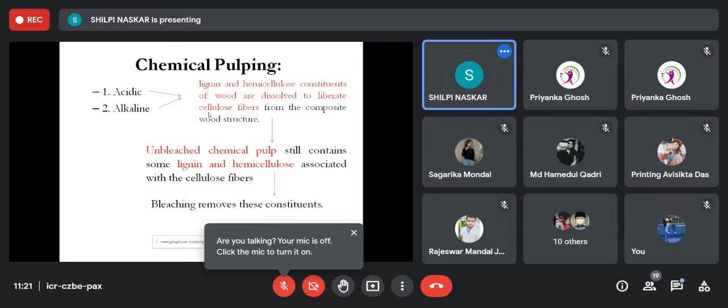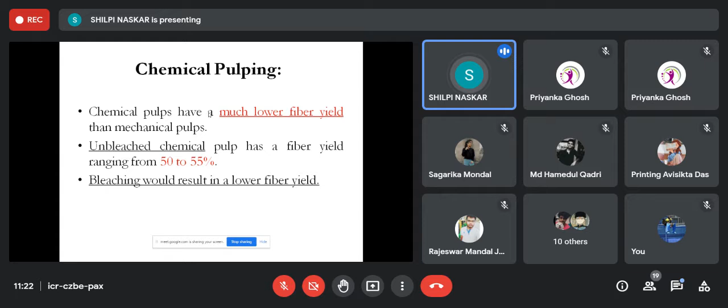And its fiber yield output from this pulping process is about 50 to 55%, and bleaching would remove that lignin or actually bleach that lignin part. Okay, so that also results in a low fiber yield. Okay, because you are separating lignin there. Okay.

So starting the sulfite pulping. Okay. This is acidic pulping as we have learned before. Okay, in the sulfite process, pulp chips or wood chips are cooked with sulfurous acid and one of its base salts, which may be calcium, sodium, magnesium, or ammonium. Okay.

Sulfurous acid is normally produced by burning sulfur in presence of oxygen at controlled pressure and temperature, so that sulfur trioxide is not produced, because sulfur trioxide reacts with water and produces sulfuric acid. Okay, but we need sulfurous acid. So we need to burn the sulfur in presence of oxygen at controlled pressure and temperature, so that it produces sulfur dioxide. And then when it reacts with water, it produces sulfurous acid.

Sulfurous acid and limestone are next reacted to form calcium bisulfite. Now, this calcium bisulfite, sulfurous acid, and the pulp, when reacted with each other, produce hexose, pentose, sulfonated lignin, and the segregated cellulose.

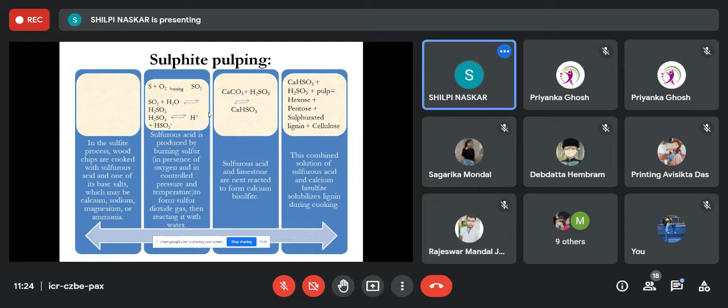Basically, this hexose and pentose comes when the hemicellulose hydrolyzes; it produces hexose and pentose. Okay. So in sulfite pulping, not only the lignin is getting separated, the hemicellulose is also getting separated to separate the cellulosic fiber. Okay.

Now, I have already told you hemicellulose comes in the spent solution in the form of hexose and pentose. Okay. Due to absence of hemicellulose, the strength of the paper is decreased a little. Okay. The sulfite process is not suitable for pulping wood having high resinous content. Okay, this is the limitation of sulfite pulping.

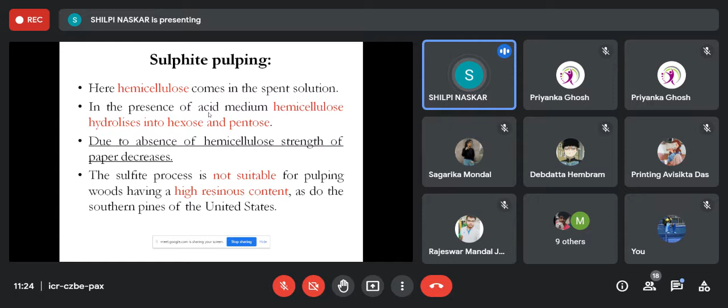So this is the block diagram of sulfite pulping. Okay, here in the burner, as you can see, I don't know if you can see the cursor or not. The burner, that is the middle part of the left. Okay, in the burner, partial combustion of sulfur is done in presence of oxygen. Okay, the sulfur and oxygen.

And partially sulfur dioxide is produced. In the combustion chamber, combustion of sulfur is completed and cold sulfur dioxide and water is sent to the scrubber. I do not know if you can see the cursor or not. Okay, so first scrubber at the top left hand side. In the scrubber, SO2 reacts with water and sulfurous acid is produced, and finally it is sent to the acid storage.

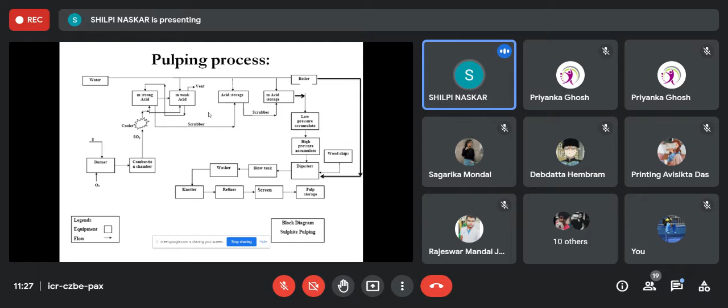Okay, here we'll not be learning the configuration of blow tank and washer. We'll be learning it at the sulfate pulping. We'll be learning about the configuration of the digesters. Now, the type of acid pulping or sulfite pulping. There are two types. One is cold acid process and another is hot acid process. Cold acid process, the digestion temperature is about 30 degrees and pressure is equal to atmospheric pressure and time necessitated is 7 to 10 hours. Definitely the power consumption is less.

In hot acid process, digestion temperature is 80 degrees centigrade and pressure is 60 to 70 psi. And digestion time is 5.5 to 7 hours. In hot acid process, power consumption is definitely high. So inside the digester, temperature and pressure changes with time. During digestion, the temperature increases up to 100 to 110 degrees centigrade. And time when temperature increases is 4 hours.

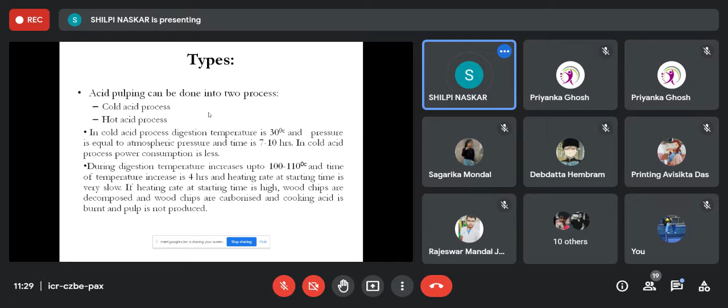And heating rate at starting time is very slow. Why? Because if heating rate at the starting time is very high, then what will happen? Wood chips are decomposed and wood chips will be carbonized and cooking acid is burned and pulp will not be produced. So, after reaching temperature 110 degrees centigrade, heating rate is increased.

Now, in this time, cooking acid comes in contact with the lignin. During digestion, vapor is produced and temperature is increased and pressure is also increased. So, to reduce the pressure, certain amount of condensable vapor is released to the high pressure accumulator and non-condensable vapor is released through vent. So, pressure falls and temperature falls. Heating may be direct or indirect.

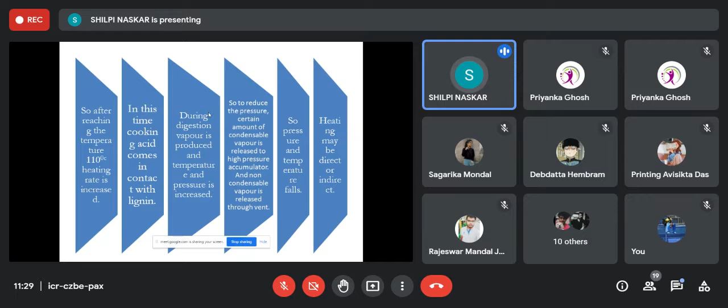So, what are the properties of the sulfite pulp? Unbleached sulfite pulp has moderate strength, soft and flexible. Has low lignin content and easily bleached. It is used for supplement of mechanical pulping, for example, newsprint. Sulfite pulp has long been used to make white printing and writing paper because bleaching again removes some of the lignin. The sulfite process was the most important chemical pulping process until the mid 1900s. So, what are the limitations of this process?

In recent years, the pollution amendment has become more stringent, requiring recovery of polluting substance. But here, to recover the calcium sulfite liquor and thereby reduce the pollution load of its effluents, other chemical bases have evolved, since it is impractical to recover calcium sulfite. So, the sulfite process has been largely replaced by alkaline pulping process nowadays, with sodium, magnesium, and ammonium bases adapted to pulp mill chemical recovery systems. Chemical recovery is possible for sulfate pulping, so it is now in the picture in a more efficient manner.

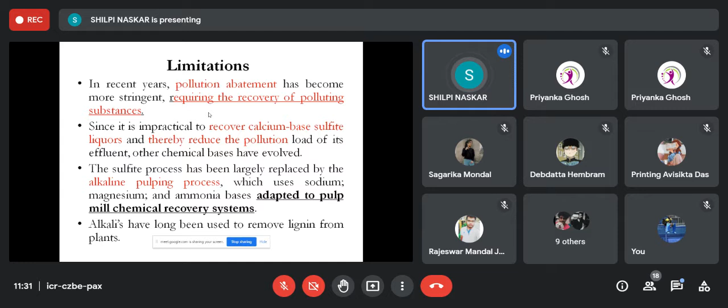Alkali have long been used to remove lignin basically, though the hemicellulose cannot be separated.

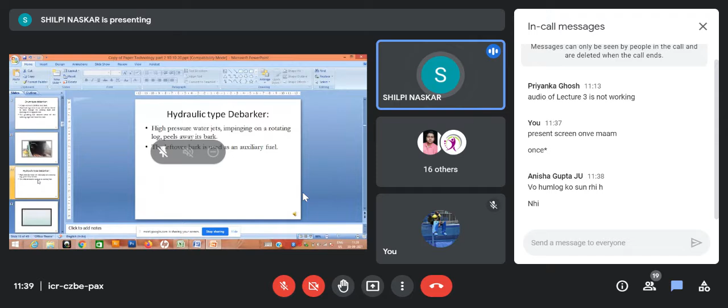Okay, okay fine, sorry I haven't shared my screen, I'm so sorry, your entire screen, sorry. Let me check. Okay, which slide is not working? Just a minute, this slide was not working.

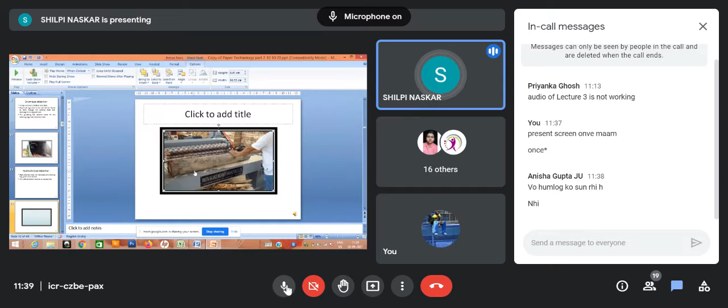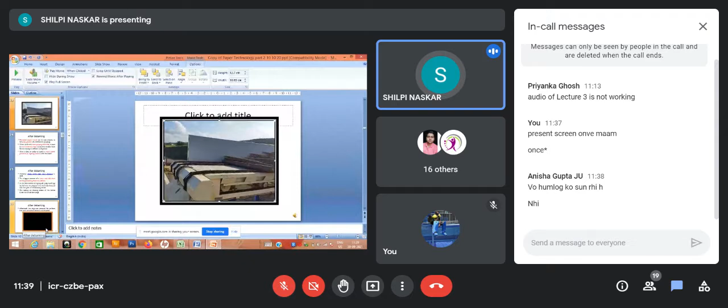This should be working, this machine should be working, then this machine should be working. So send the exact slide number, which one is not working, then I'll rectify that and send it back to you. Okay, fine, just do that.

Okay, now next is today's lecture. That is the 5th lecture. This lecture is about chemical recovery. I hope you have already gone through the configuration of all of the digester, then diffuser, and all of the instruments which I have told you about in the sulfate pulping. Okay.

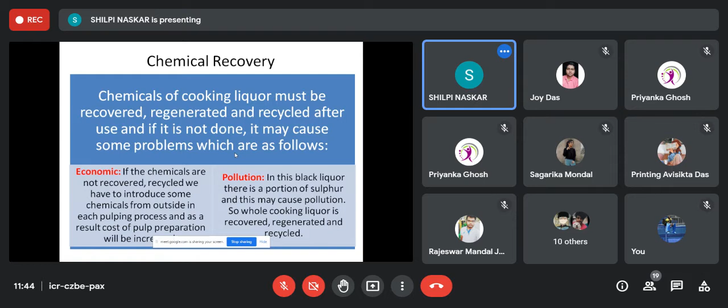See, some of the slide has been recorded, which is not that clear. So I am doing it fresh. So I'm not going for the slideshow view. It is kind of a totally theoretical one. Just let me go to the slide. Just a minute.

Okay, fine. The problem is that the recording does not have very good sound quality. So I'm doing it in normal mode. So I'm doing it in this mode.

Okay. So this is the fifth lecture of chemical recovery of the pulping process, of the sulfate pulping process. So the chemicals of the cooking liquor which is being used for sulfate pulping must be recovered, regenerated and recycled after use, and if you do not do it, it creates certain problems. Why is sulfate pulping used so hugely? Because the chemicals and the heat energy can be recovered. That's why the cost of the process will be lower, as you can reuse the chemical.

On the contrary, you cannot reuse the chemical of sulfite pulping. So that's why the cost of sulfate pulping is lower, and that's why it is more into the picture. So first it is economic. If the chemicals are not recovered and recycled, we have to introduce fresh or virgin chemical from outside in each pulping process, and as a result the cost of pulping will be more. So if you can reuse it, it will be economic.

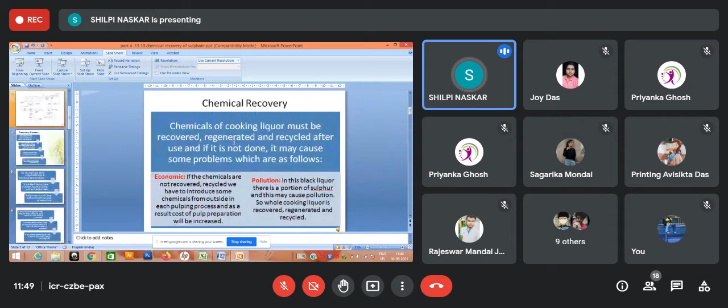I have shown it, just a minute. No, I have to tell you that I haven't found the video actually. You can check on YouTube if you find a relevant one.

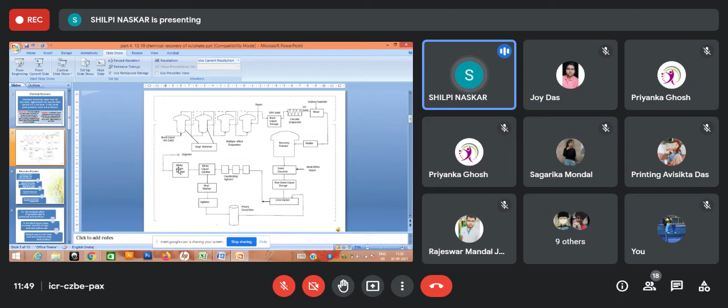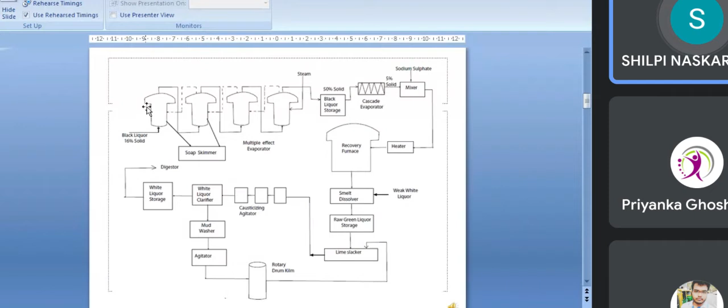So the configuration of this multiple effect evaporator is that it has shell and tube: the outside shell, and inside there are tubes. The black liquor passes through the tubes and steam passes through the outside shell. These are multiple effect evaporators, 1, 2, 3, 4. The black liquor passes through the tube and the steam is at the outside shell.

So it will not be in direct contact. Black liquor passes through the tube and steam passes through the shell, and in this way the evaporation happens. In the multiple effect evaporator, soap is produced as a byproduct. Moisture is there from sulfate pulping, because only 16% solids is there, so some moisture will be evaporated off.

Okay, due to this steaming operation, the soap will be produced as byproduct. Now in the black liquor there is certain amount of fatty acid.

Just check. The process is whatever I am telling you. If you find it not that easy to connect, these things are written in the next slides actually. As I am showing this block diagram, if you understand from here, it will be better understandable. So that's why I'm sticking to this particular slide basically.

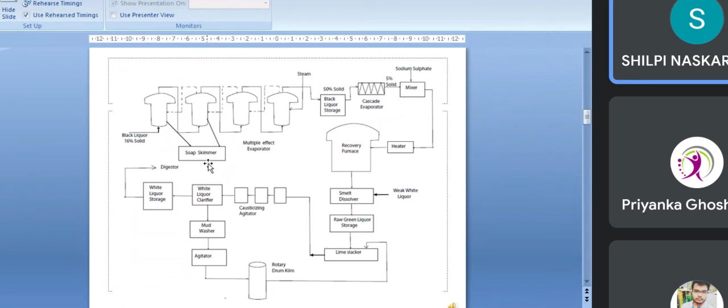So next it will go to the black liquor storage, but before that, in the black liquor there is certain amount of fatty acid and sodium salt. So sodium reacts with fatty acid and produces the soap as byproduct. So this is the operation of the multiple effect evaporator, and this is also called as the soap skimmer. Okay, so everything is written over there in this process, whatever I have told.

So just see the block diagram. I can definitely go back anytime. Okay, it will then go to the black liquor storage, then cascade evaporator. So everything, okay, this is 65%. Here I have not written it right. This is a typing mistake. 65%. So every process is done here to remove the part and to recover the chemical basically.

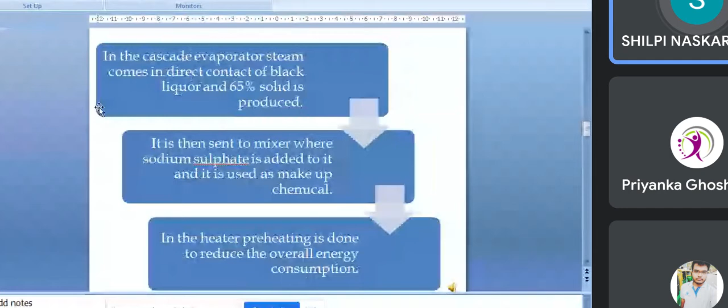So here the 16% solid in the evaporator, steam is applied, everything is given over here. In the multiple effect evaporator, soap is produced as byproduct. Now in the cascade evaporator, that is the next evaporator, the steam comes in direct contact with the black liquor, and 65% solid is produced. If you remember, we have started with 16% of solid in the black liquor, which comes out of the sulfate pulping process.

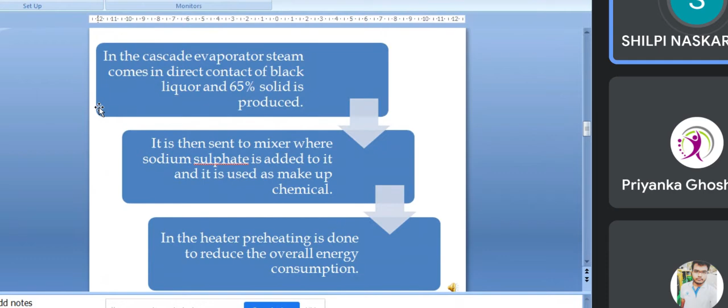Now it is then sent to the mixer where sodium sulfate is added to it and is used as makeup chemical basically. In the heater, preheating is done to reduce the overall energy consumption. So in the cascade evaporator, after it comes in direct contact with the steam, it produces 65% of solid, and the outcome goes to the mixer where it is mixed with the sodium sulfate, which is the makeup chemical. Then it goes to the heater for preheating, and then it goes to the recovery furnace.

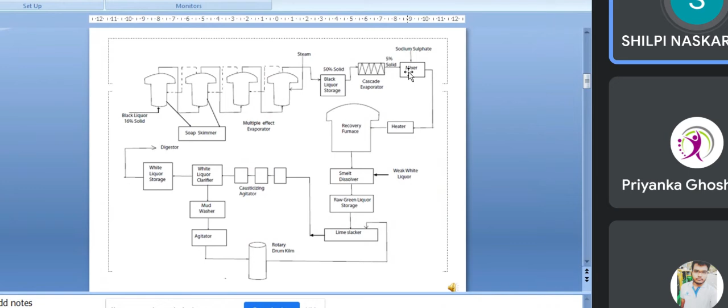Now, in the heater, the preheating is done to reduce the overall energy consumption in the recovery furnace. If heating is done previously, in the recovery furnace the reaction can start instantaneously. So, in the recovery furnace, the organic portion of the black liquor will be combusted to H2O and CO2, and the inorganic portion is separated. Now sodium sulfate, which has been added as makeup chemical in the mixer, reacts with carbon and produces sodium sulfide and carbon dioxide in the recovery furnace.

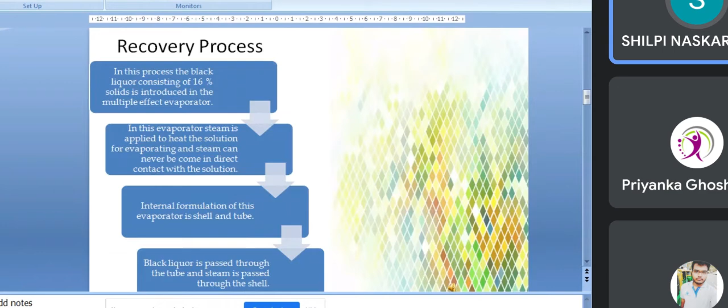So the reaction is Na2SO4 plus 2C, producing Na2S plus 2CO2. And if you remember the process of sulfate pulping, Na2S is used as the reactant there.

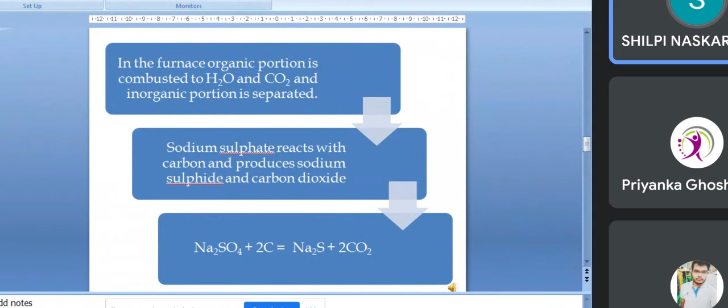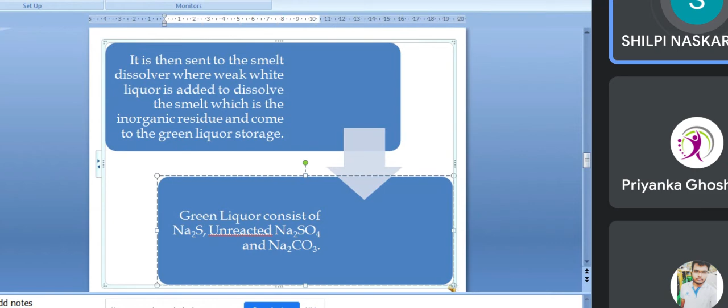Now coming to the next. From the recovery furnace, it is then sent to the smelt dissolver, where weak white liquor is added to dissolve the smelt, which is the inorganic residue, and comes to the green liquor storage. Now in this green liquor storage, what chemicals will be there? Na2S from the previous reaction, unreacted Na2SO4, since all the Na2SO4 may not be used, and Na2CO3. These all are the reactants of the sulfate pulping process, if you remember.

Now next it is the lime slaker. There Ca(OH)2 is added with the chemicals which have already been recovered, and in this lime slaker a causticizing agitator is used to agitate the whole chemical. The agitator basically has a paddle with a stator. This is kind of a stirrer which will stir the whole chemical so that the Ca(OH)2 can react with all other chemicals.

In this causticizing agitator, the agitator will agitate so that the Ca(OH)2 will react with the Na2CO3, and it will be producing NaOH and CaCO3.

So Ca(OH)2. This is the common reaction all of us know, actually. So NaOH plus CaCO3 will be produced as the reaction output of Ca(OH)2 plus Na2CO3, and this is called the causticizing reaction. Then the dissolved part in the liquid is sent to the white liquor storage, and the undissolved portion is then sent to the mud washer. Okay,

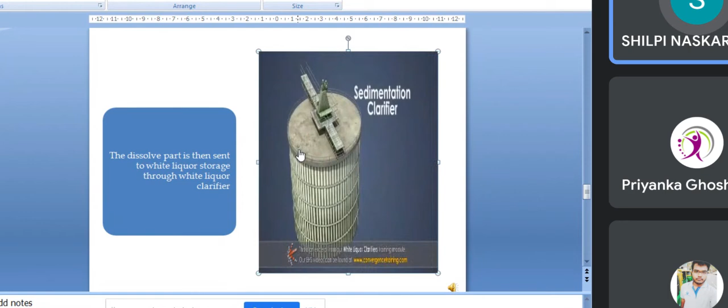then the rotary drum kiln where CaCO3 is heated. There is the rotary drum kiln. Okay, fine. This also has a video, basically. Okay, so this is the chemical recovery part, the chemical recovery process. This is the sedimentation clarifier.

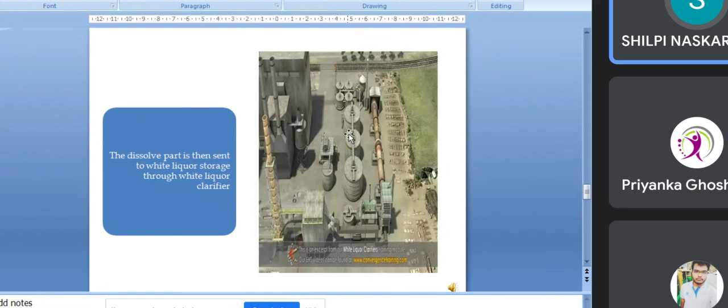The reaction can happen properly, and this is the total plant structure of the chemical recovery plant. Basically, all the process is being done inline in different separate troughs, so that the reaction can happen separately. So here the undissolved portion is sent to this mud washer, and this is then sent to the rotary drum kiln where the CaCO3 is heated to produce CaO and CO2.

Okay, the CaO comes to the lime slaker where H2O reacts with it and it produces Ca(OH)2, basically. So the main thing is that you have recovered Na2S, you have recovered all the initial chemicals. You have recovered Na2CO3 with the help of Ca(OH)2. You have already recovered the CaCO3 also, NaOH also. So these all are the reactants of the sulfate pulping process. So thereby you have recovered all the chemicals of the sulfate pulping process which are being used.

Definitely the strength of the chemical will not be like the beginning. The strength will be lessened because you have already used it. So you cannot use this recycled chemical directly in a new batch of sulfate pulping. You have to add certain virgin chemical to have proper strength so that it can react with the lignin, carbohydrate and other extractive parts of the pulp to remove them from the cellulosic fiber, and you can reuse the chemicals in this way.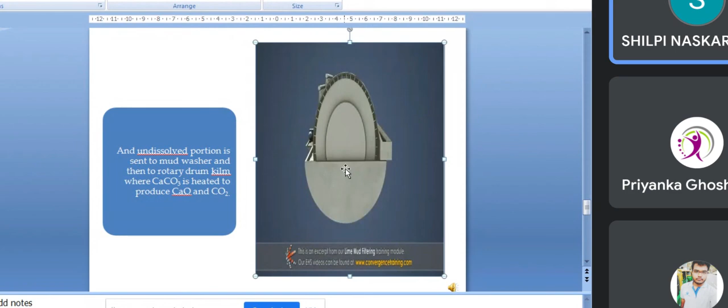And sulfate pulping is in the picture as it is cost effective due to this reusing or recycling process. The recycling of chemicals can be done, and heat energy can also be recovered from sulfate pulping. So that's why sulfate pulping is more in the picture rather than sulfite pulping, as that is acidic and chemical recovery cannot be done there. So per unit cost will be higher in case of sulfite pulping, whereas sulfate pulping is more economic, and the pollution is also less.

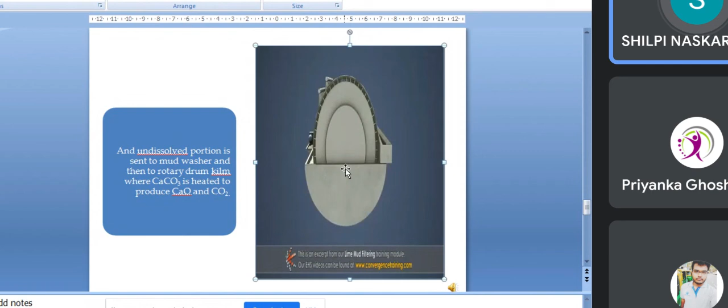So this is all about chemical recovery, and the total pulping is completed. Next we will be doing the screening and cleaning, and next the bleaching operation, which removes the residual lignin, whatever has been left; it will be not only removed, it will be whitened. Actually, the brightness will be increased by the bleaching process. And then all other operations, and I'll be briefing those too.

Do you have any question? I hope you can hear my voice. Okay, yes, net connection is there. Do you have any question? No, ma'am.